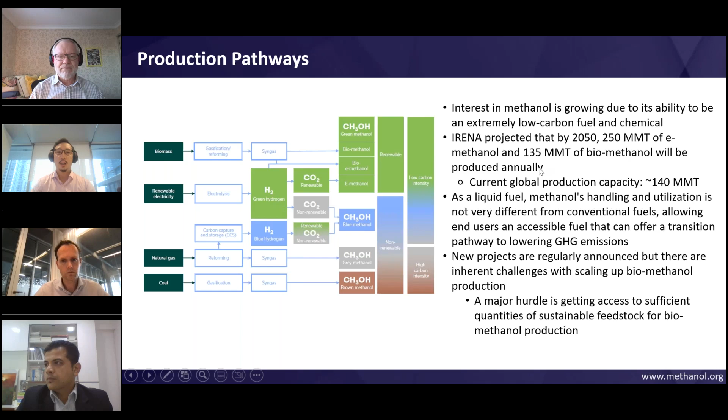One more thing to add: on the Methanol Institute website, you would find a global map where we track different projects around the world. It's an interactive map, so you can move your cursor over the icons, and it will reveal the name of the project, the projected production capacity, and the startup year of these plants. So if you want more access to E and biomethanol projects around the world, the MI website is a good place to go, or you can reach out to any of the MI staff in our offices around the world.

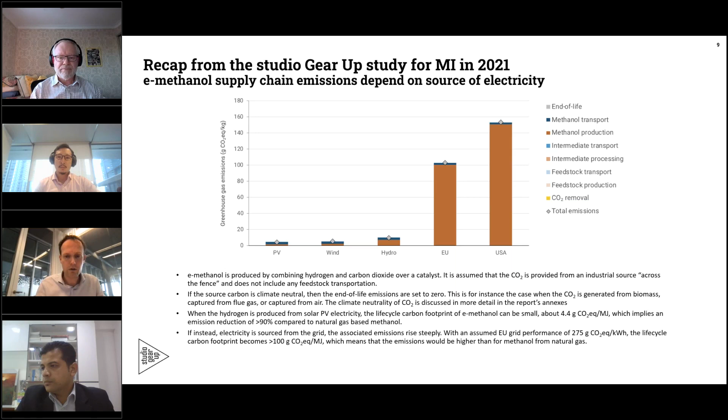So we really need to focus on renewable electricity, otherwise it doesn't make sense. Details, again, you can find them all in that report. But there is something with the source of the CO2 that I want to draw your attention to.

First of all, e-methanol in Europe we call it an RFNBO, a renewable fuel of non-biological origin, and it is stimulated by the Renewable Energy Directive, the current one and also the upcoming one. The upcoming Renewable Energy Directive, which has been discussed in Parliament and will be discussed in the trilogue, so soon will hopefully also be legislation, asks for 2.6% of all energy in transport to concern RFNBOs. The Parliament and actually also the Commission would like to go higher with that, maybe to 5.6%.

And also in aviation, there's a sub-target on volume basis that 0.7% of all jet fuels should consist of RFNBOs. So this means there will be significant demand for RFNBOs. It's almost guaranteed by legislation, and e-methanol is an option.

The source of all the RFNBOs is obviously renewable hydrogen, which has to be based on renewable electricity. So it could also be that a large part of the RFNBOs is renewable hydrogen, and there are also other options like E-jet, Fischer-Tropsch pathways. Several pathways are possible, but we think there could be a quite interesting market for e-methanol.

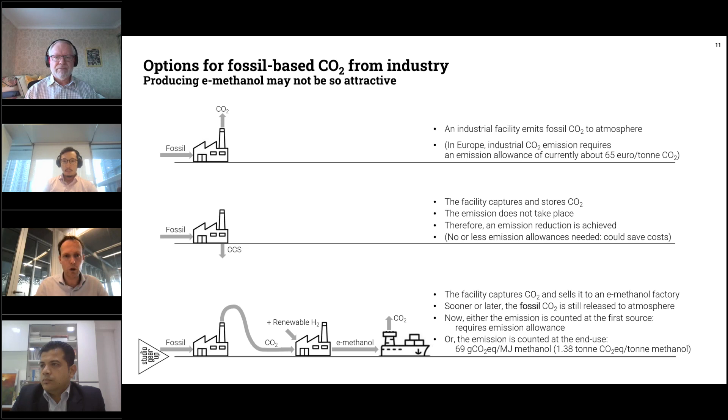So this is—I tried to explain it in the most clear way, but I know it's cryptical. You may have to think about it. Please do so, and I'll hear your questions in the panel.

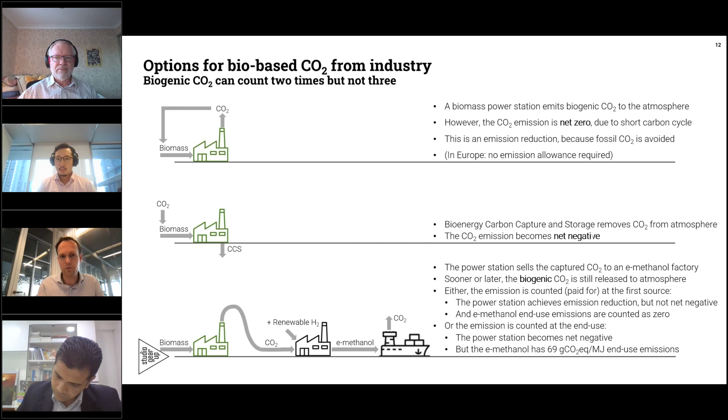One interesting variation we can make on the last slide's schemes is if we don't have a power station, but instead—oops, I did not want to jump to the conclusions yet.

If we have not a power station, but a biofuel production facility that also emits CO2—let's assume it's ethanol production, where co-production of CO2 is almost a kilogram per kilogram, or a biogas installation producing a significant amount of CO2 in rather pure form. The CO2 would normally go to air when the biofuel is consumed in the vehicle, so there's also a CO2 emission there. Actually, if you add up all the CO2 emissions along the supply chain, it's the same as what has been absorbed by the biomass in the first place.

So this is perfect, and it is carbon neutral, net zero. If we follow the same pattern, we would apply CCS there, and the biofuel, with this supply chain, is removing CO2 from the air. So we're not only saving fossil carbon emissions by putting the biofuel in the car, but the whole supply chain is even removing CO2 from the atmosphere. In European legislation, this is awarded as a kind of CCS credit.

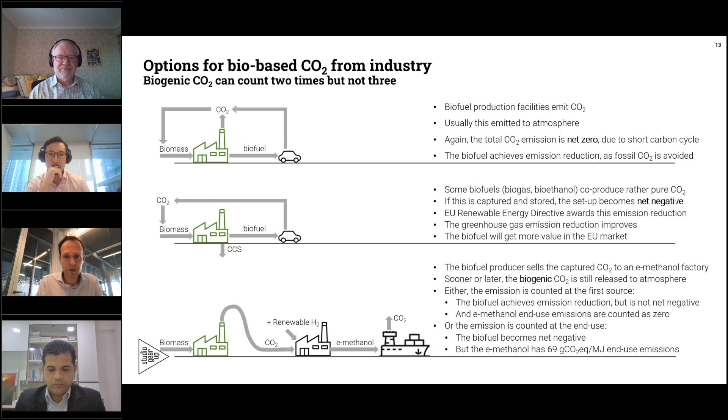Let me then come to the conclusions. First of all, I don't want to end on a negative note, but you just need to be careful. There will be a huge demand for RFNBOs in the EU, and I suppose also elsewhere around the globe, and it could really imply an interesting market for e-methanol. It does depend on the source of the CO2 and also on the alternative options that the CO2 seller has. In any case, the use of fossil CO2 will be limited in time, so you will have to make sure that if you build your business case on this, you also have another option to jump over to.

E-methanol is only interesting if the CO2 emitted from the end use can be regarded as climate neutral. Otherwise, the minimum required greenhouse gas saving will never be achieved. So CO2 emission reduction can be achieved via carbon capture and can only be claimed once—either at the seller's location or at the e-methanol location. And whether this is interesting for the seller will depend on the value of the climate-free CO2 molecule.

The options for the seller: will he have access to storage? Is storage an alternative? The price of CO2 emission allowances in case of fossil-based CO2. And also, what is the value of an improved greenhouse gas performance for the biofuels, for example for ethanol, if they would apply CCS? So there are multiple factors that would have to be considered. We didn't dive into this yet, but I think this is interesting food for thought.

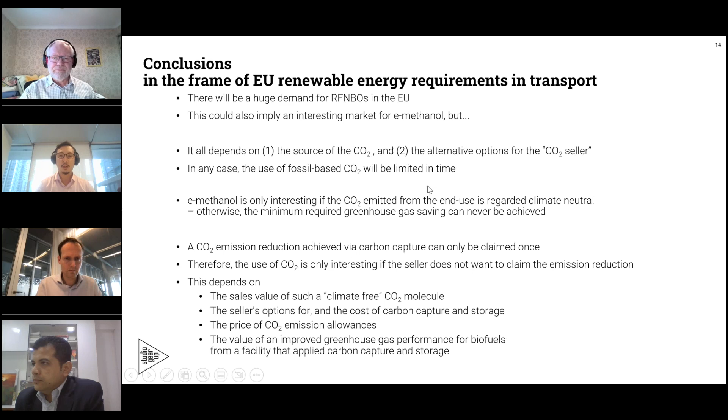Thanks, Carlo. I think those were the questions that would set the stage for the presentations to come next, where they will talk about the different feedstocks they acquire biogenic or sustainable carbon from, but also, in the widest context, there's the ongoing conversation that biogenic sources might be hard to get access to, and industrial seems to be a bit more immediate.

But definitely it seems like from a policy perspective, and also from a business perspective of some companies, that it's about this sort of transition from fossil to biogenic, and maybe, in the context of biomethanol or e-methanol, it could be even direct air capture in the future.

Yeah, so thanks, Carlo. Well, oh sorry, did you want to say something? No, I didn't mention direct air capture, but obviously that's being seen as the source of CO2 towards the further future. But thanks for adding that.

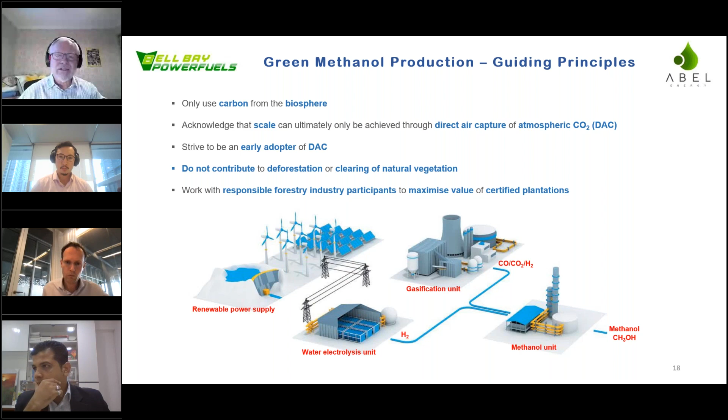The forestry industry is very important to the state of Tasmania. It provides a lot of work for people, and produces very high quality timber products, as well as paper. So making sure we all strive to achieve the best outcome for everyone concerned is very important.

Just a little bit about the project location - you can see there in North Tasmania, our project is at the Port of Bell Bay. As I mentioned earlier, the use of biomass not only gives us an opportunity to make green methanol, with a time frame around 2025-26 when we're looking to start production, but it also gives us a very efficient source of carbon in the form of carbon monoxide as well as carbon dioxide.

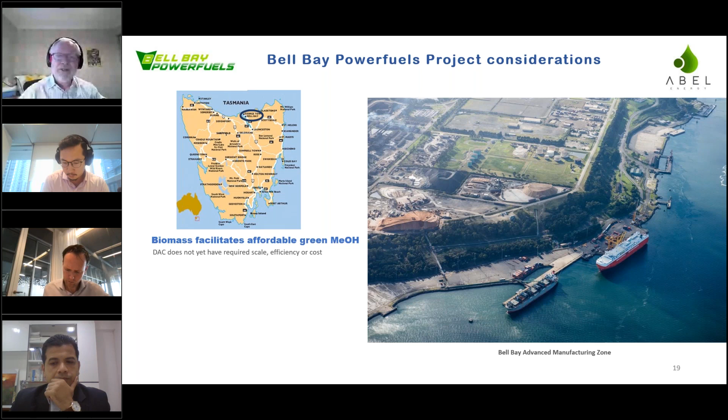It's sensible for us, and certainly our customers will demand, that we only deal with plantations. There are a number of different certification schemes, but we think we can ensure we stay within those schemes that have the most integrity. We want to use the lowest value biomass first. We do not want to be using bio-oils, as the renewable diesel industry has to contend with.

Having said that, there are other ways of using biomass which are starting to gather steam. Wood pellet production has not been a big industry in Australia, but we are starting to see the wood pellet industry also potentially competing for the same material, so that's something we need to be aware of. And of course, we don't want to be moving biomass large distances. We've tried to site our project in the centre of an industry where biomass is moved relatively short distances, which reduces the carbon intensity of our production process.

So look forward to any questions, and thank you very much for your attention.

Thanks, Michael, for introducing the ABEL Energy project. One of the questions I have for you, and we'll entertain more during the Q&A session, is: what was the biggest challenge in working with the timber industry in acquiring feedstock? And were there any solutions that ABEL came up with to circumvent or address these challenges?

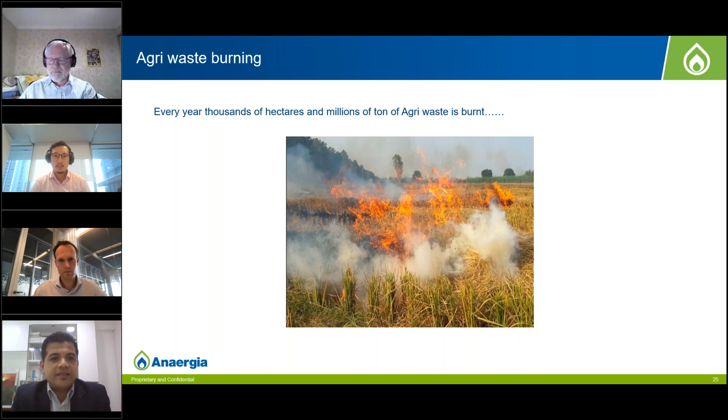This is another problem which, in many developing nations, you will see—thousands of hectares every year and millions of tons of agricultural waste is literally, sadly, burned, leading to greenhouse gas emissions, carbon dioxide emissions. This is a massive problem. Come Southeast Asia, India, a lot of places, this is just burned. So this is another big problem.

Now let's talk about what can be done. Imagine this garbage which you see in front of your screen, as well as the straw or agricultural waste, can actually power ships and maritime industrial decarbonization.

Quickly about Anaergia: we are one of the world's largest organic waste to renewable fuel technology solutions providers. We are listed on the Toronto Stock Exchange, so a Canadian company. We do only one business, and that is to convert any and every kind of organic waste into renewable power, renewable gas, renewable fuel, recyclables, clean water, and fertilizer.

We do not offer any equipment or technology. What we offer is a waste particle coming in and a green molecule going out—the entire end-to-end solution. We also invest into projects, we partner with investors, we co-develop projects, we build those projects, we commission them, and we own, operate, and maintain them. So the entire life cycle partner, so to speak.

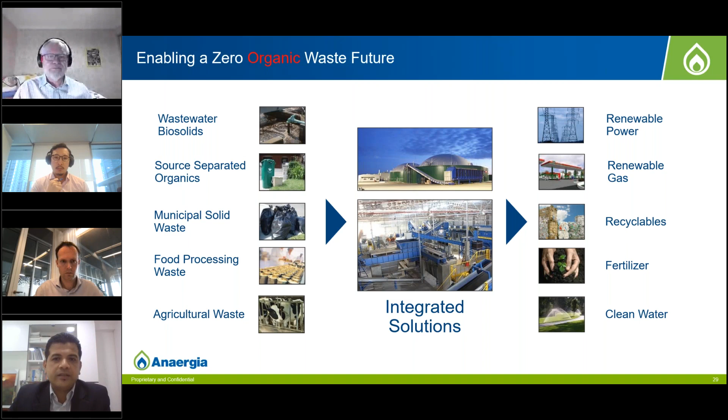This is also a key differentiator, because generally people will want to be the best technology provider and leave it there, in the hands of developers, or developers are then at the mercy of investors. But we said, in order to move things forward and really move the needle on climate change, we've got to walk the talk ourselves. So we develop, invest, and have our own technologies, and we sometimes partner with third-party technology providers as well.

Again, this is a similar slide—look at municipal solid waste, wastewater, agri-food, and I'm going to touch upon a few more feedstocks which we look at while converting them into green fuels. We have about 231 active and pending patents in this space. The middle block you'll see is the proprietary technology piece across: pre-treatment, anaerobic digestion to produce biogas, biogas upgrading to biomethane, CO2 liquefaction, wastewater treatment, and fertilizer production.

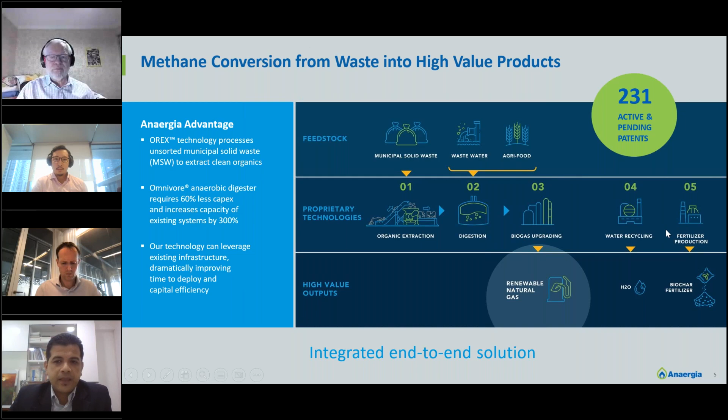It's so interesting that sometimes we go to ESG summits and people say we should do business related to ESG. Well, fortunately, anything and everything we've been doing in the company has been related to ESG. When people are only talking about decarbonization and climate change, we have actually been producing millions of MMBTU per year of biomethane and treating millions of tons per year of waste.

Just since 2010, our company has installed projects and plants across the world which divert about 8 million tons a year of organic waste from landfills. That's more than 6 times the waste produced by the city of LA, Los Angeles, with 20 million people. We produce 5 million MMBTU per year and about 134 megawatts of clean energy. We understand this business well, and we're trying to move the needle forward on it.

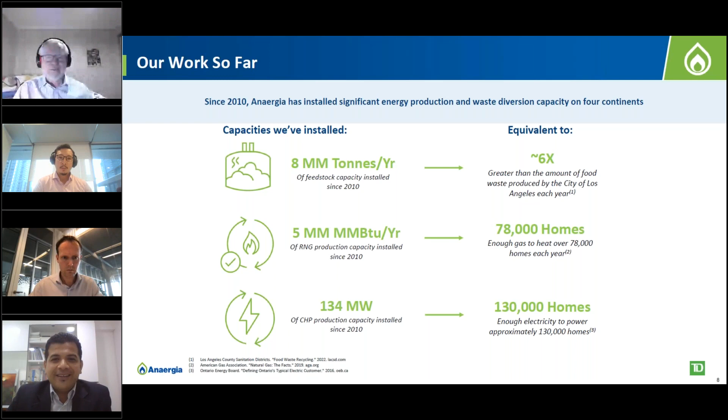Let's get into biomethanol production. I'm going to talk about biomethanol, or green methanol, production from the route of organic waste to biogas, and biogas to biomethane. Then the second route is when we convert biogas to biomethane, we get a byproduct, which is biogenic CO2. That biogenic CO2, if combined with hydrogen, gives you e-methanol. As a company, we focus on both biomethanol and e-methanol.

For e-methanol, we partner with companies who build hydrogen plants. The three major feedstocks we believe could be a perennial source: as long as human beings exist and urbanization happens, there will be municipal solid waste and food waste. So organic waste gives us biogas, biogas becomes biomethane, and biomethane becomes biomethanol. At the same time, when you convert biogas to biomethane, you get biogenic CO2, which combined with hydrogen makes e-methanol.

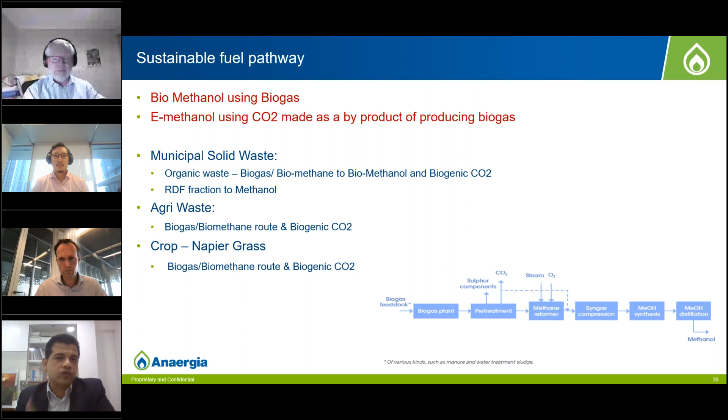The second biggest feedstock we focus on is agricultural waste—rice straw, wheat straw, and manure from cows, dairy, or chickens—any organic waste from agricultural and industrial practices. Last but not least, we're also focusing on napier grass to create massive carbon sinks, and we have a lot of experience doing that. You can have plantations of napier grass, a perennial source, cut it, put it back into the digester, and nutrients go back to the soil to grow more napier grass.

Potential feedstocks we're looking at globally include municipal solid waste, rice straw, grasses, sludges from wastewater treatment plants—every city with a wastewater treatment plant has organic sludge you can make biogas out of—and animal farm waste. The key parameters we look for are the right policy, the right feedstock aggregation (collection and logistics), the economics, and the scale. The real question is how to make this at scale.

These are the two pathways. The first pathway is municipal solid waste, where we pre-process the waste and use anaerobic digestion to make biogas, biomethane, and then SMR to methanol. One byproduct is RDF. Tim from Enerkem is going to talk about how they convert RDF to methanol. What we do is either give that RDF to companies like Enerkem, or use it ourselves to make power for methanol production—a complete self-contained facility.

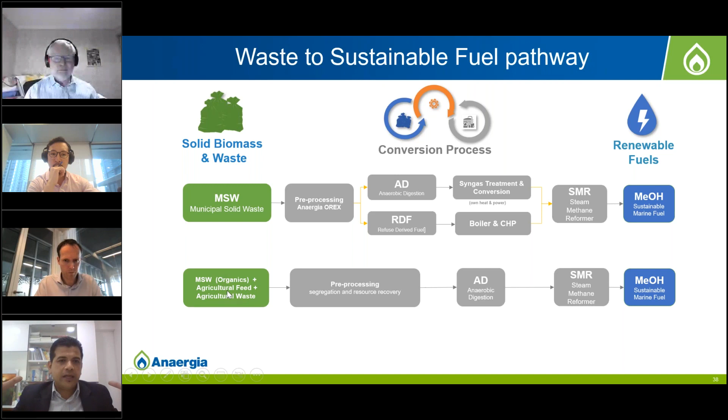The second pathway combines municipal solid waste organic fraction and agricultural waste to get massive economy of scale to make methanol.

That's an interesting process we have right now, where we go all the way: municipal solid waste coming from your home and mine goes through sorting, screening, and extracting organics from mixed waste. Yes, I repeat, we can extract organics from mixed waste. We now have 14 plants in the world running on this, where we take that feedstock into an anaerobic digestion system to make biogas, SMR to methanol, and the RDF can be used in an RDF boiler to generate heat, steam, electricity, and CO2. This CO2 can then be blended with hydrogen to co-locate biogas-to-biomethanol and RDF-to-CO2 processes—capturing CO2, adding hydrogen, and making more methanol. It's like a complex combining biomethanol and e-methanol together to bring massive scale.

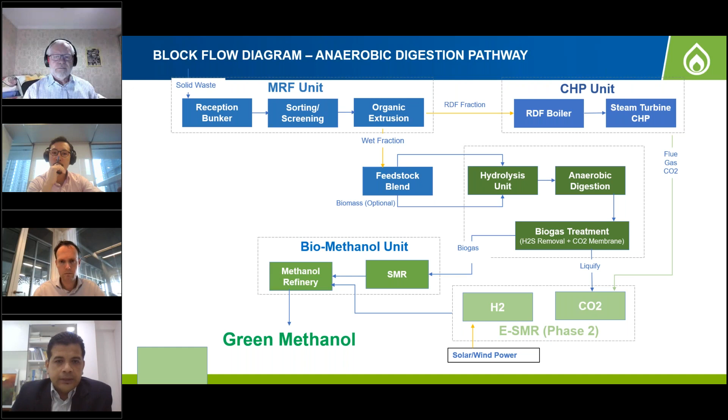So this is the secret sauce which the company has on extracting organics. In layman's terms, we call it a garlic press, which kind of extracts organics from mixed waste. So now we have extracted organics from MSW, and this is running.

None of the technologies I've presented so far are lab scale or coming from a laboratory. All the stuff we're now looking at building have been built. We have plants running and operating with these technologies, which is very interesting because when investors want to put a lot of money into biomethanol or e-methanol projects, the last thing they want is technology risk. Since we are also investors as a company, we understand what boxes equity and debt providers need ticked, and that's where we use proven technologies.

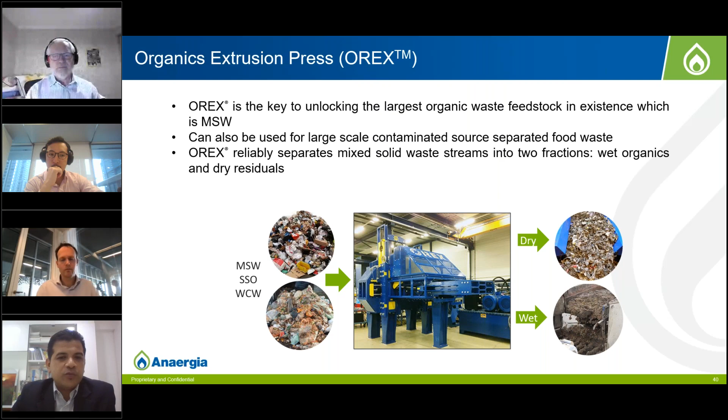As I was explaining, with mixed waste you extract the organic fraction and the rejects, and this organic fraction is then polished further and put into an anaerobic digestion process.

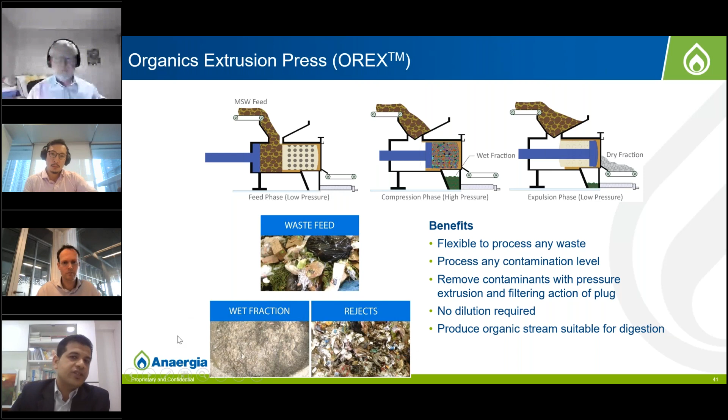Second thing we touched upon - I personally think, and I've done a lot of research on this myself, looking at many projects - there are 2 or 3 large biorefineries of methanol which could be built just on this waste which is burned every year. We have proprietary process to convert rice straw into biogas at scale. I'm talking about facilities of about 80,000 to 100,000 metric tons a year of biomethanol, just from rice straw.

The issues we are grappling with and trying to manage are the strategy to collect at scale - we're talking about hundreds and thousands of hectares of rice plantation. Second is the logistics, and also trying to mix it with other feedstocks to do co-digestion.

Here we are working with people from the farming community, large landowners, and the key is aggregation, but also incentivizing the farmers on why they should give this waste of theirs to us. We are working in a very interesting fashion, giving them back seeds, fertilizer, and the logistics cost is being worked out. Imagine this much amount of feedstock.

If it's going to come to a centralized facility, we're talking about 30-40 square kilometers. We are even thinking that since we make biogas, the trucks used to transfer rice agricultural waste or wheat straw from the fields to the facility will be powered by bio-CNG. So you don't use diesel trucks anymore, you use CNG trucks, which you're anyway making from biogas. This makes the complete life cycle carbon negative, basically.

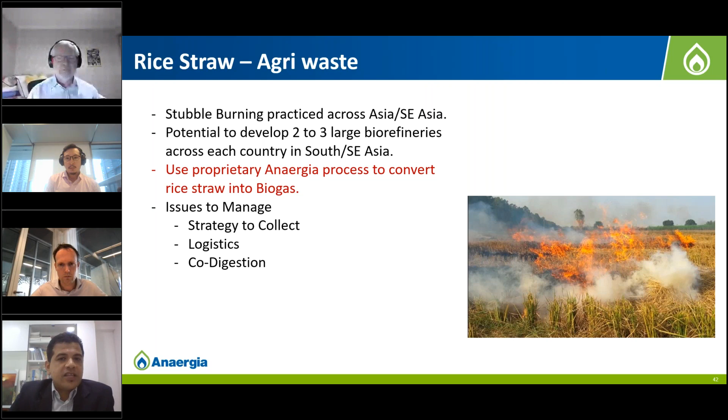This is the third thing I mentioned. So doing a small recap, we talked about solid waste from cities and industries, second was rice straw or agricultural waste, and the third thing is napier grass.

I think there is a lot of low productive barren land which can really be converted into carbon sinks. I'm talking about thousands of hectares of this in Southeast Asia, in Africa for example, and even Latin America. Tropical places, humidity is very good, water requirement is not high, and there are vast tracts of land which are not competing with crops, because that's a sensitive topic. The last thing we want is to convert crops, maize and corn, into napier grass for fuel.

But I think there is enough land, and from our experience we've done a lot of ground work - there's a lot of land available. Here we are using Anaergia proprietary technologies to really reduce down the cost of processing at scale. That's the key - at scale and lower cost, so that we achieve the biomethane requirement.

Consolidation of land is a big problem here, because you're talking about a huge amount of land. And the economics is the cost of growing, cultivating, cutting, and bringing it to the plant, and the logistics around it. Anaerobic digestion has been running in the world for maybe 150, 200 years at scale - huge plants. Our largest plant is in North America, generating about 1.2 million MMBTU per year of green gas, which is equivalent to about 50,000 metric tons a year of methanol already, for example.

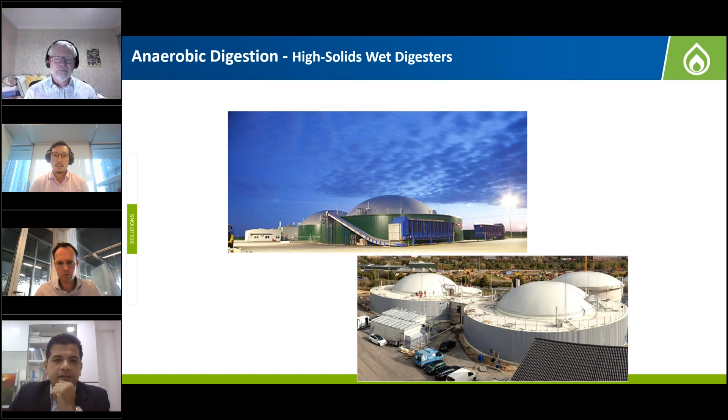I'm not going to say how e-methanol is made, Michael and Carlo have covered it, but we are proud and honored to be supporting one of the world leaders, Maersk, to fuel their first container vessel on e-methanol. This project is being built by European Energy in Denmark, and we are supplying biogenic CO2 from our biogas plant to their facility, which is combined with hydrogen.

This is the first large e-methanol at-scale production facility in the world. It's amazing that things are moving in this space, and people are not just talking about it, but things are actually happening.

This is the facility from where we are going to give biogenic CO2 to European Energy. The first phase of the project is completed, and the second phase is going on. We're talking about 60,000 tons a year of liquefied biogenic CO2. In this project, we convert different kinds of organic waste into biogas and biogas into biomethane, and you get CO2 as a byproduct. We have a 10-year offtake contract on this project.

This was the facility I was talking about in Los Angeles, the largest organic processing facility in North America. With this kind of biomethane, we're talking about a large quantity of methanol that could be generated. In this particular case, we make biomethane because the regulations around biomethane in California and the federal RIN standards in the US are very progressive for making methane rather than methanol. You get more money when you make methane than methanol, and that's how it's structured right now.

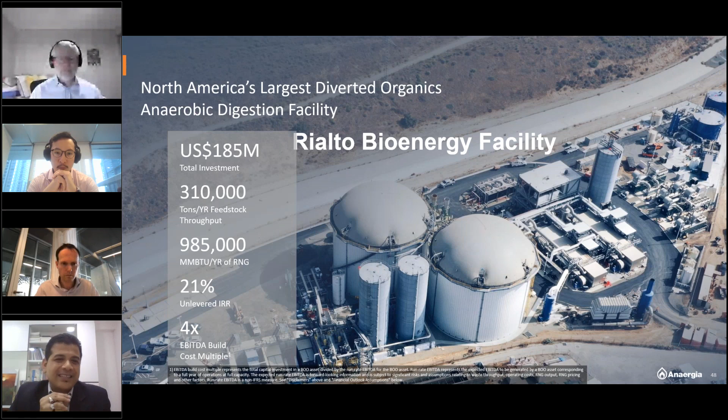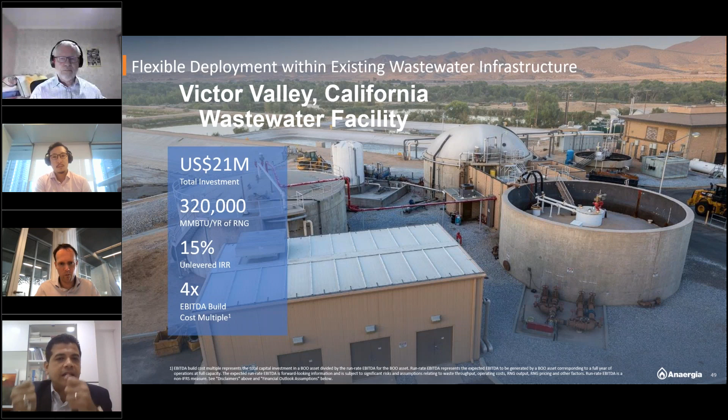That's another project, just to give you an example of how wastewater sludge works. Every city generates wastewater, and we are converting wastewater sludge of a city combined with food waste of the city into biogas and green energy.

Sorry for that long story, but I'd like to summarize with key actions and takeaways. We all understand that maritime decarbonization needs to happen like yesterday morning. In our humble experience, waste to fuel is doable and possible, and I underline and underscore at scale. The technology is available and proven, and people like us are willing to give performance guarantees and process guarantees.

Feedstock aggregation and regulatory support is needed, especially in developing economies where maximum methanol consumption happens, for example, Singapore and the regions of the Suez Canal and Panama Canal where ships pass.

Critical points for commercial viability, Tim, is the feedstock cost, which would then determine the cost of methanol. Location is very critical - it's one thing to make methanol, and another to bunker it, store it, and be able to give it to the ships. There's a lot of cost involved in that infrastructure, which we all need to calculate and put into per metric ton.

I think scale is important. You've got to build large scale plants to make methanol. We just saw the numbers, Tim, in your slide - what we are touching is just the surface, or even not scratching the surface.

Carbon offset price could be interesting, and we are seeing a lot of people working towards that. Mitigation of feedstock risk is to do co-digestion, having more than one type of feedstock, and the beauty of biogas is that it can digest more than one type of organic feedstock.

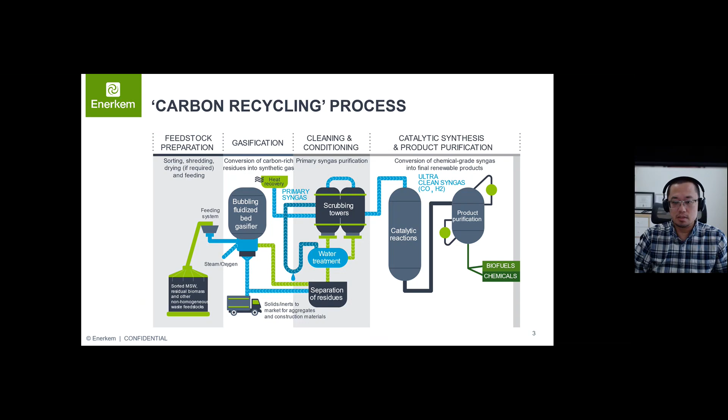Enerkem's technology can process a very wide range of feedstocks. So far, we have successfully tested over 25 feedstocks in our process. Most common feedstocks include municipal solid waste, agricultural biomass, forest biomass, as well as treated wood and C&D wood, and waste plastics.

Feedstock site selection is an important consideration when developing a project. Feedstock is selected considering availability, cost or tipping fee, and its impact on production yield, product carbon intensity, eligible incentives, and ultimately the realized project financial performance. Thus, we have developed a tool to optimize feedstock selection based on local waste basket and project profitability.

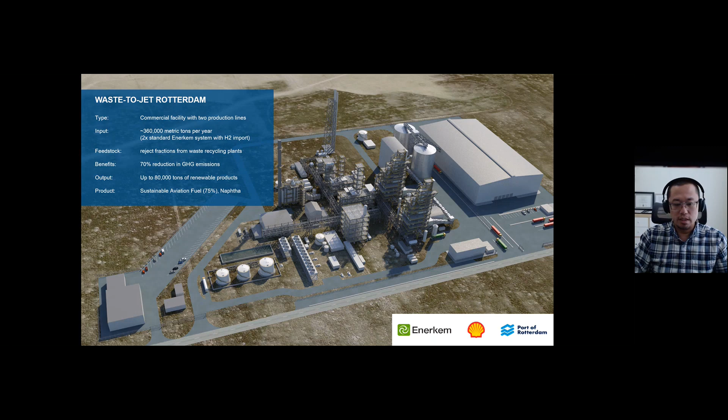The Rotterdam Waste-to-Jet project has the same waste processing capacity of the Tarragona project, but with a different focus on sustainable aviation fuel production, with roughly 70% GHG reduction comparing to incumbent technologies. This project is done in collaboration with Shell and the Port of Rotterdam.